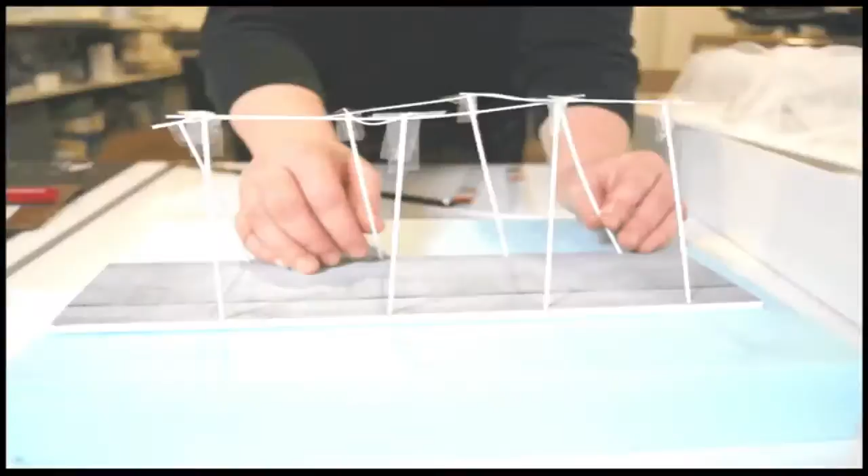So we started to think of this white Cartesian grid, the modernist grid, in a way standing for the idea of modernity. But then, rather than a stable grid, we wanted to make a weak grid - a grid that is not holding anything up, but is always on the verge of collapse, that is flexible and pliable, and doesn't offer support, but actually only offers imbalance.

And we thought of this idea to cover the entire courtyard with this weak system, this white gridded system made out of fiberglass poles held together with bungee cords, then populated with activators - things that would make people interact with this system. The idea being that we are responsible for these systems. We inhabit these systems, and if we start to interact with them, we might cause ripples, deformations, and collapse.

And so we went to MoMA and said, we're going to fill this courtyard with a system that's always on the verge of collapse. And we realized it's probably not a good idea to propose that when there's 4,000 drunk people there listening to bands and DJs.

So the day before the presentation, we quickly faked this image in Photoshop, and we grabbed a logo from Buro Happold, which is a big engineering firm in New York. And we said, we understand it's very risky, but don't worry, the whole thing has been calculated, and it will stand. And so MoMA said, that's great, you win.

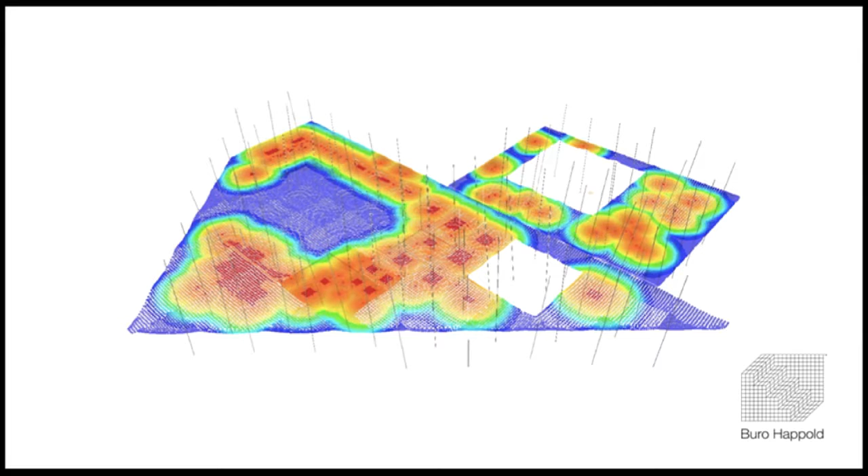And so we called Buro Happold, and we said, congratulations, we won. And they said, what did we win? And we said, well, we have this idea of a system that is continuously being fed with unpredictable inputs that can collapse at any moment. And he said, that's great, but the funny thing is this cannot be calculated. This is the opposite of what we do as engineers. What we do is we design risk outside of the system, and what you want to do is infuse the system with as much unpredictability as possible.

And so all you can do is build it. And so we went to the courtyard, and we started to test. This is Ilias, who now became partner. He was our first staff. And you see the elements that it is made up of.

And we were trying to find a way in which this system was dancing and sort of finding its balance, but also led to certain instability in a certain way. And you see the activators. We had hooks and balls. I will speak about those in a little bit. And so that looked really great.

And then we went home, and we got an email from the caretaker at PS1 saying, can you please come and clean out the mess? We have a donor event tomorrow.

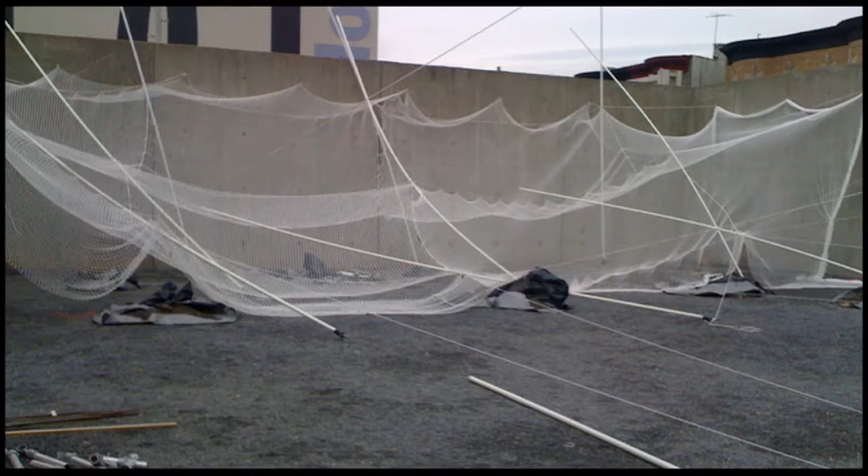And so we realized that through trial and error, we ultimately found, by calibrating the amount of cells and the tightness of the knots, we were able to find a balance within the system, and gradually this supplely responsive system started to emerge within the courtyard, which then was activated by these balls.

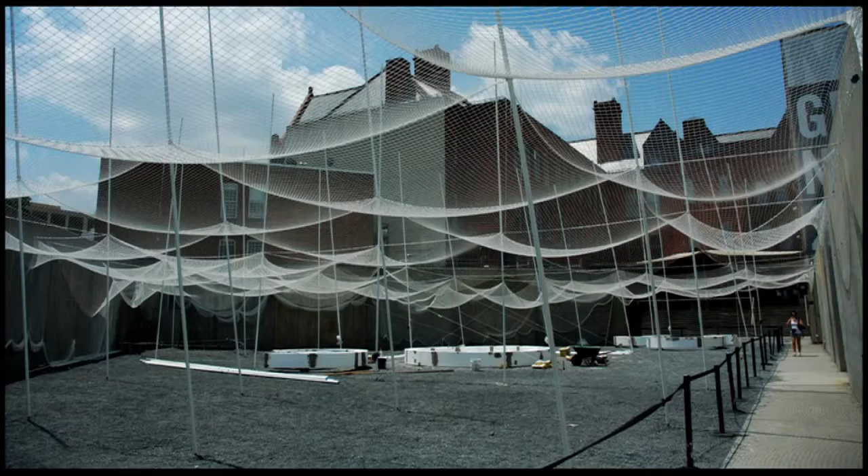This was in a way also alluding to the virtual realm, which to an extent seems more playful, and we wanted to create things that people could invent games and start playing with. And so these were images we found online on social media showing how people started to actually work within this system. So this was a system that had a certain definition to it, but at the same time was left open for interpretation and play.

And later we worked with other people that were interested in doing performances in this. We worked with a composer who connected the system to a sound system where you could move the poles and they would change the sounds. There was actually a dance being done by a group called Body and Pole, which were professional, the American champion pole dancers, who did a performance here. And so this idea of an open system, where you give a certain definition and you allow people to find ways to occupy it and work with it.

So that was one temporary installation, but that's nice within the confines of, say, the art museum and the institute. But how, if you really want to operate in the real world, how do you do that? We had to sort of develop an attitude for that too.

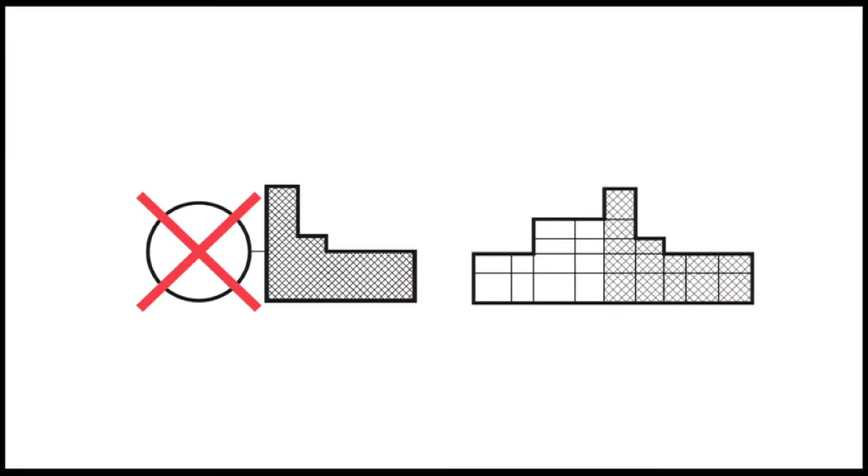We didn't want to make a generic extension. We wanted to integrate on the right the old and on the left the new in white. We started to think: can we come up with a very simple organizational system, because there's no collection—this museum doesn't have a collection.

So how can we organize a system for ideas and artists that don't yet exist, but create a new infrastructure for display within that? We looked at what makes the existing building specific—it's actually not their spaces, but their openings. We started to think: can we work with just the wall and the opening as a way to generate a scheme? We looked at the traditional museum, which is basically the enfilade organization.

It's a traditional way of storytelling in a museum. You go from room to room to room, and the curator can very precisely orchestrate your experience. And we thought that's too traditional for today.

Then we looked at a more modern idea of exhibition rooms, where the wall opens up at one end and space flows from one to the other, which I think is a very typical modernist idea. But we said, what is a way of navigating, what is a way of storytelling that fits with our age, in which we in a way tell our own stories.

The way we browse through the internet, the way we curate our own visual identity and collections through things like Pinterest and Instagram—how do we navigate space, contemporary space, in the physical realm?

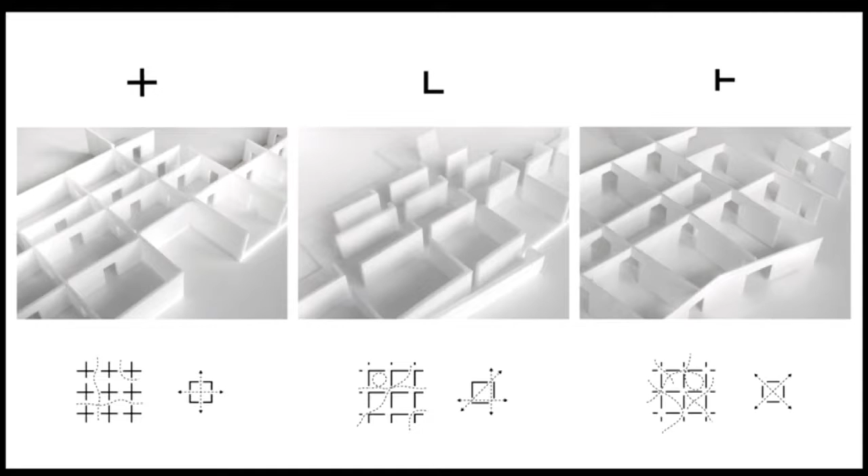So we made a very complicated looking script to impress our Belgian jury. But actually it's a very simple thing: this being the city, this being the beautiful garden, this being the old museum, that being the new.

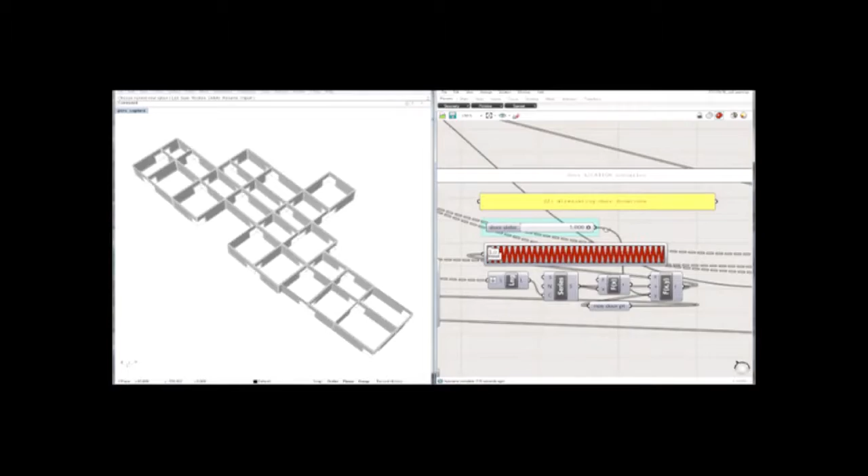It was a very precise calibration of openings and where they sit within the rooms, and they would increase from the city towards the yard. So the further you get into the system, the more porous it becomes, and the more it opens up into the garden. And so the scheme we settled on was basically closed corners for concentration.

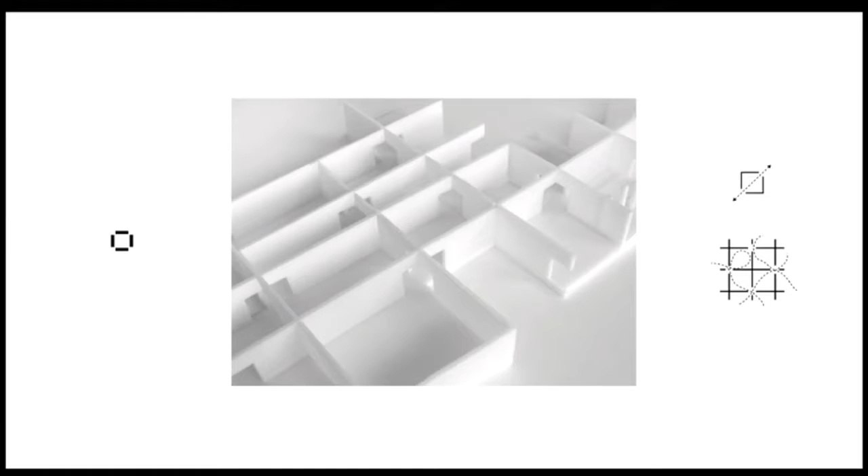Where the rooms come together, the doors overlap and create these portals. That means that every time you come out of a room, it's up to the visitor to make a choice—where do you go? How do you continue this story?

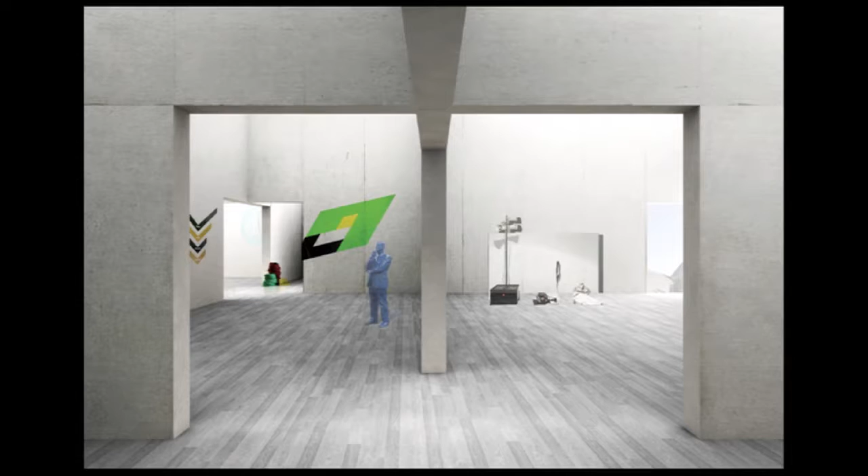It's a completely different way of thinking about how to organize a museum. It would allow for completely new ways for curators to organize space, because, for instance, they could have parallel stories, parallel narratives happening within the same system.

So we took the old, we extended the new, and we cut these openings, and we also changed the existing building toward these openings. This is a model we made, and it showed that old and new came together not by adding, but actually by subtraction. And here you see the plan.

There was this entrance toward the city—this is the commercial city, but you enter under the oblique, and you come back into the old entry hall. From there you can move through these spaces.

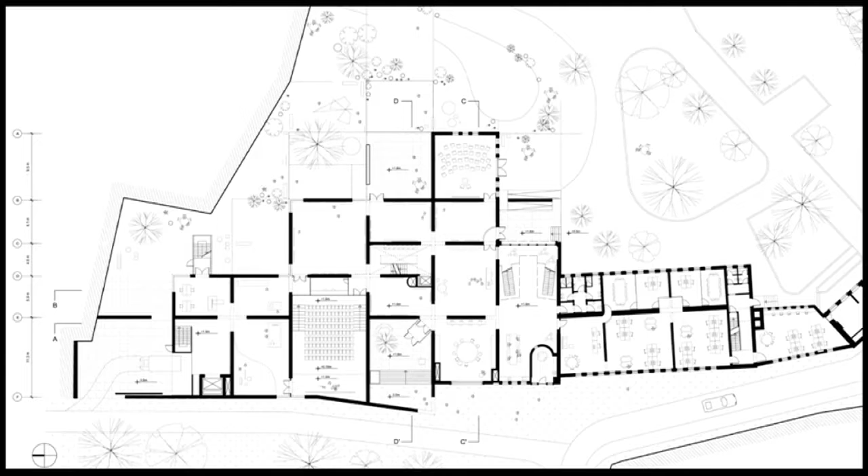Rather than fitting the program really precisely, because programs change continuously, we said you have a variety of rooms, a catalog of rooms in which different things can happen. It's a very simple but robust infrastructure, and with skylights and proportions we changed, so although the system is very rigid, there was a lot of variety of spaces.

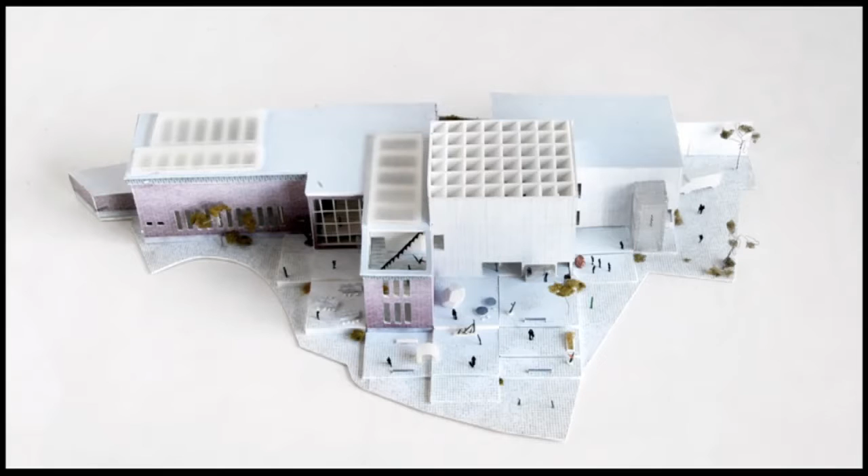These spaces can be used for display, but they can also be used as a library or reading room or what have you. Here you see the massing of the extension and the way it sits within this courtyard and becomes part of the urban fabric as a frame.

And so we became second, which we do a lot.

But then—is it a year ago now? No, maybe actually a year and a half ago—we were asked to make an exhibition in the Netherlands for a collection by a Dutch collector who had been collecting for 60 years, and this was the first time they were going to show their collection to the public.

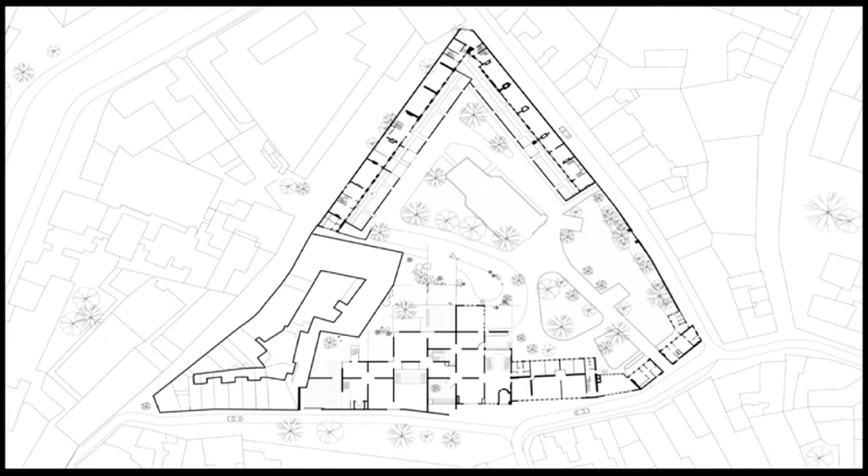At the Stedelijk Museum in Amsterdam, which is the municipal or public museum of contemporary art there, we worked with the same system, and there it played a slightly different role.

This idea of choice, of you as a visitor being forced to choose your path rather than being led by a curator, resembled the way the collector made his own choices. Every space had an artist, but every time you came out of a room, you had to choose the next way to move through the space. Very similar to the choice a collector is forced to make, and trying to see new relationships between the different artists that he and his wife had collected over 60 years. So in some way, the structure here was trying to resemble this act of collecting, decision making, and finding longer relationships in that collection. That speaks about structure and the idea to think about it.

Now let's talk about edge. This is a project we completed in 2012, a gallery for contemporary art in Seoul, Korea. This is Seoul, looking from one of the hills in the north towards the more historic area where the gallery is situated, and on the right, at the end, is the palace. This neighborhood with a lot of beautiful old homes was housing for people who worked in the palace, and is now preserved as one of the few historic areas in Seoul. It's becoming a very popular area for tourists, with coffee shops and nice ways to spend a Sunday. Programs are moving in, and a contemporary arts scene is moving into this place.

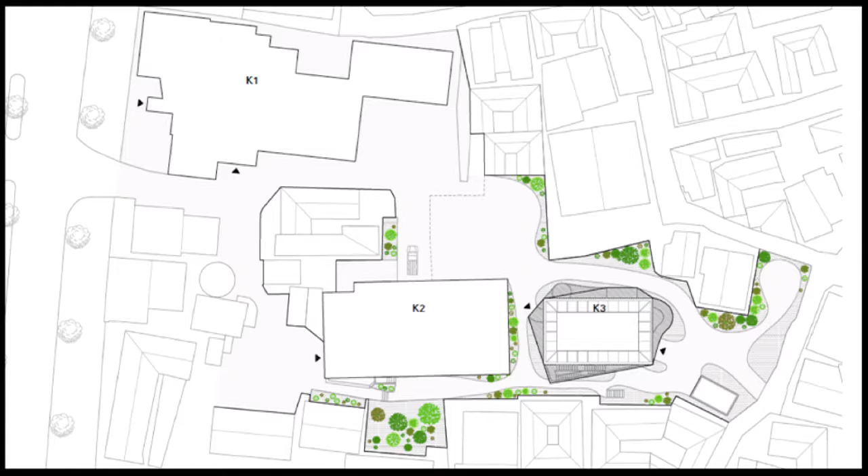So it's a contemporary arts gallery. They already had two buildings, Kukje Gallery K1 and K2, and we were asked to make the third. As contemporary art goes, we don't know what it's going to be, so make the biggest box possible is typically what's being asked when making spaces for contemporary art. You see how these old historical courtyard homes around there are being gradually infiltrated by these larger anonymous white cubes for contemporary art. So we looked at what was the biggest box possible there, zoning-wise, to fit within this area, column-free and tall, emphasizing the clarity of this box.

We pushed all circulation out. There's two floors of storage and a theater underneath, and the elevator and staircase take you out of this box and into the spaces below. This is the entry, the vestibule, and this is a staircase to the roof from which you can see the palace. We were about to fly to Korea to present this project, and we thought this is way too hard and aggressive for this very fine-grained, soft, fine-meshed context.

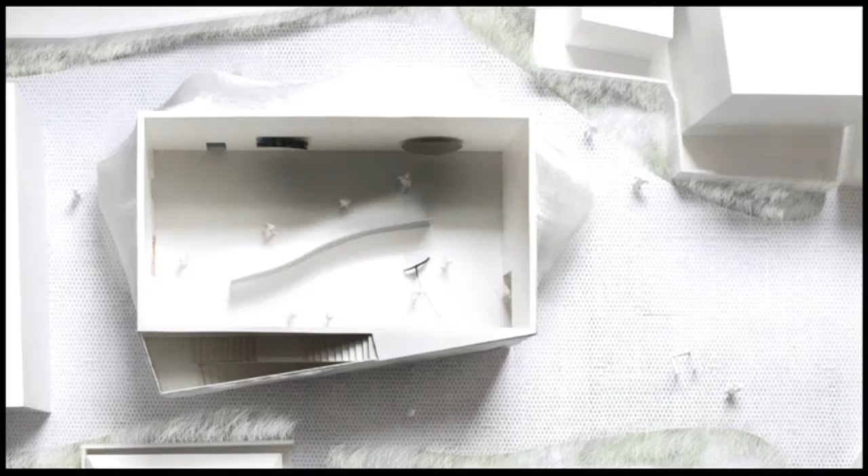So before we left, we thought, let's wrap this thing in some sort of soft, permanent fog, some boundary that erases this diagram, creates a space in between, something that evokes that image we showed. We made this model, went to Korea, and our client, a very busy lady, came, took her sunglasses off, and said, 'I like it, make it,' and left. Seriously, that was what it took, one minute.

She didn't ask, "What is it?" Because we had no idea what it was either. We just knew that we had to make it. So we had to think, well, what is this thing? What is it? How do we make this? And we realized it has very complex geometry.

We realized it wasn't about the geometry. This project isn't about its form, so we didn't want a very hard, articulated form. We didn't want to shingle it, build a structure and support it the way Frank Gehry might. It needed to have a softness, but at the same time it's outside, there's snow, it needs to be strong and withstand the conditions there.

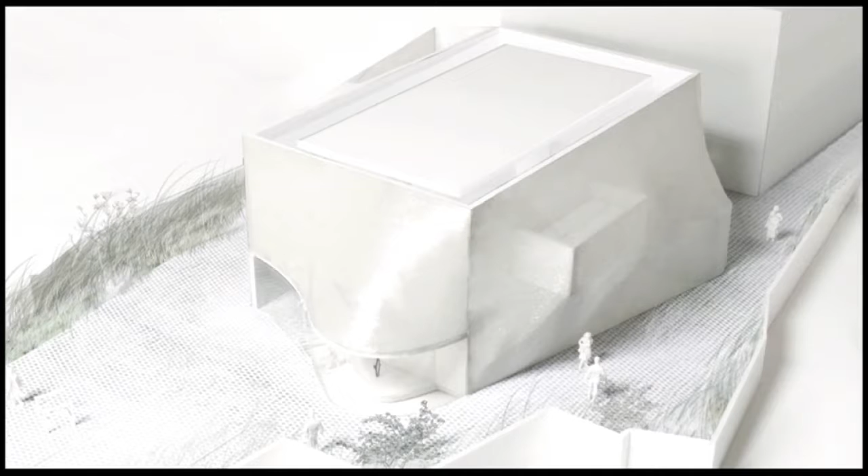So we were looking for something very pliable and at the same time very strong. We looked a lot, and then we came across chainmail mesh, which plies beautifully to double curvature and at the same time is very strong. But it's designed for the body, for armor. It's now used in butcher gloves, fencing gear, and belly dancing attire, but it's not something made for architecture. It's not a material that exists within our architectural vocabulary.

So we started to test. This is the biggest you could buy online or in stores. These were tests in our office, because what is the scale of the building rather than the scale of the body? How do you want this thing to appear? How do you want it to look? And also, what is its scale, basically?

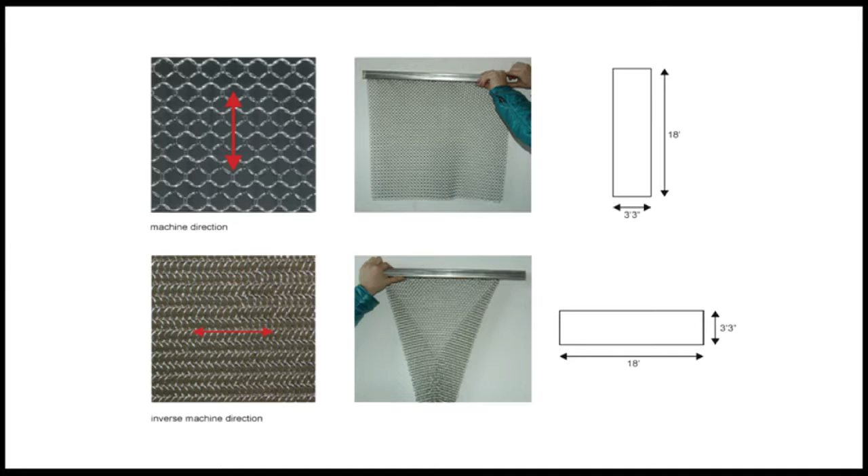As we were doing tests, we were also trying to understand how does it actually work. How does this thing take on this complex geometry? Because it's not elastic, but it works elastic, it works because of the way these rings tie together. So we started to understand how this thing works, what is acceptable, how taut can this thing be. We mapped the whole building.

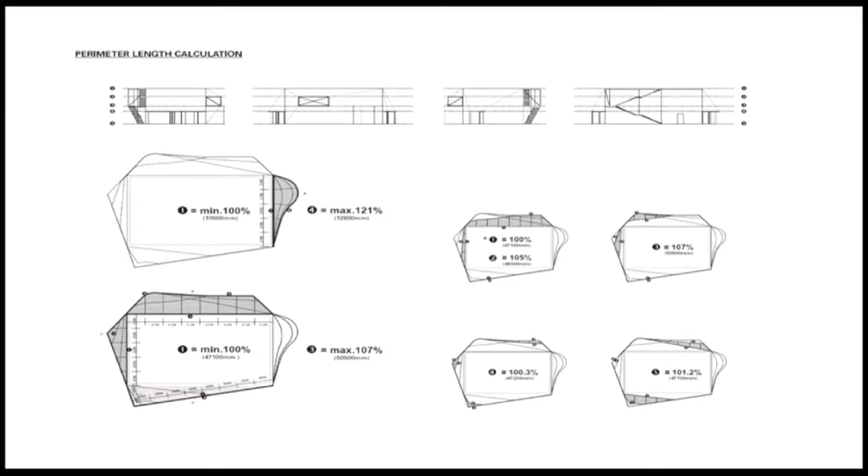Then we started to talk to our friends, engineers we had worked with in the past, Mike Ra, a friend of ours. He said, well, if you now know roughly how big you want this thing to be visually, let's start testing it. Let's see how strong it needs to be, let's see how thick it needs to be.

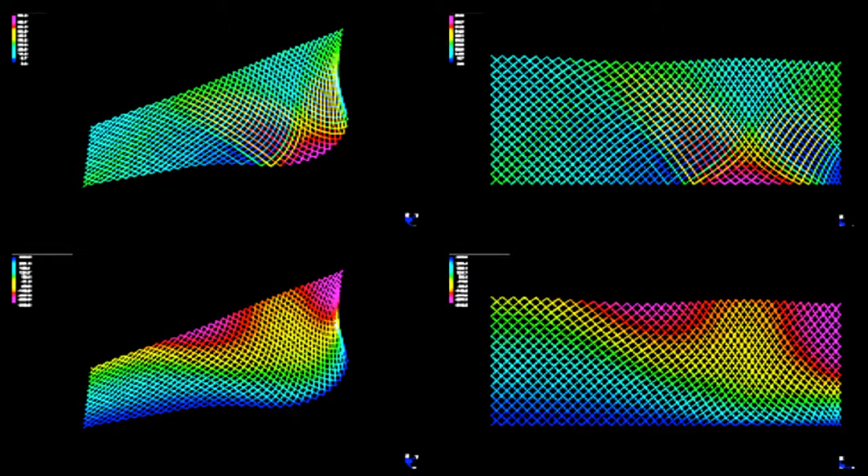We started to do some tests in labs, and very quickly they were able to model this thing, the whole skin, in the computer. We had a perfectly beautiful CATIA model with every ring in there and its exact behavior. But because this thing was never done before, and at that moment we had already promised our client that we would realize it, we thought, let's have a parallel process.

Let's build the same building physically—this is in our office—at a 1 to 10 scale. We always try to balance what you can do in the computer with what you can do physically, and I think that's the way we typically operate, checking the physical and the digital against each other. At this moment, we really knew what this was and how it would work.

So then we thought, are we now going to translate this into Korean and write a Korean spec for somebody else to build? And then we thought, well, that's going to take a lot of time. Why don't we just make it ourselves?

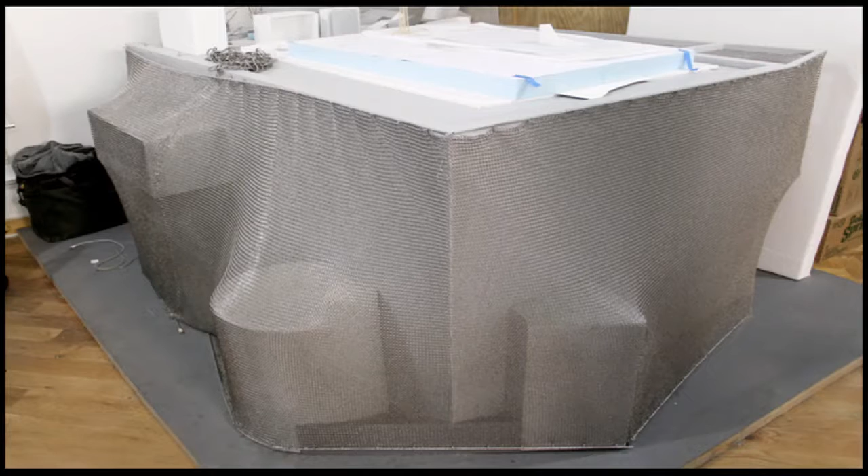So we went to Alibaba.com and typed in ring mesh, and very quickly we got a lot of people asking us to Skype with them. Most of the people were actually coming from Anping, an area in China. At some point we were Skyping for a long time with a girl whose Skype name, strangely enough, was Ring. After Skyping with her for a couple of months, they sent us this and said, hey, that looks promising, right? Maybe these people can actually make this.

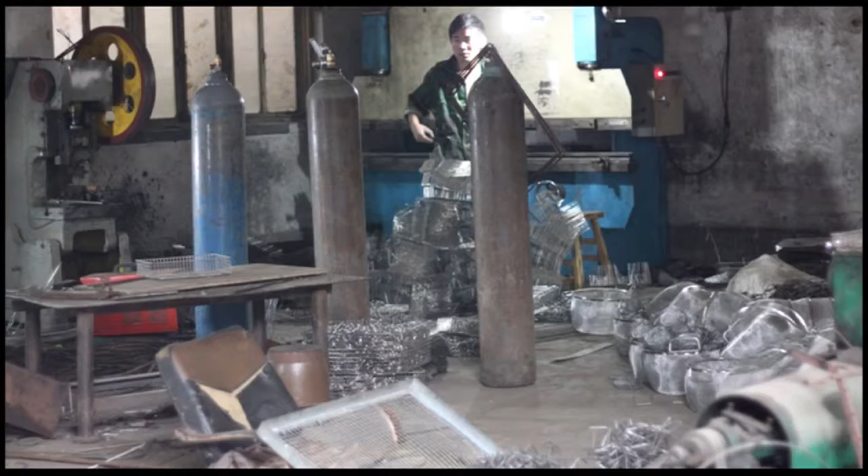So we flew to Beijing, and then we drove for 5 hours to the southwest. I don't know how many people have met their partner online first and then met in reality later. But we came into Anping, which was a strange town where you could buy dog on the street. We came into this very small courtyard, not much bigger than the area here in front of the seats, and there was one guy hand welding this stuff together.

Here's Jing, my partner, and there's Mike, the engineer, and behind him the ring. Jing here is explaining that we need 500,000 rings, and that it's probably impossible for them to actually make this, which was very disappointing, but also showed how incredibly weird our world has become.

Ring then said, well, everybody in this town can actually weld, so why don't we just all do this together? So we worked with them and with the whole community, and we found a new method of production where multiple people could work on the same thing, because all these rings are actually hand welded together—500,000 of them.

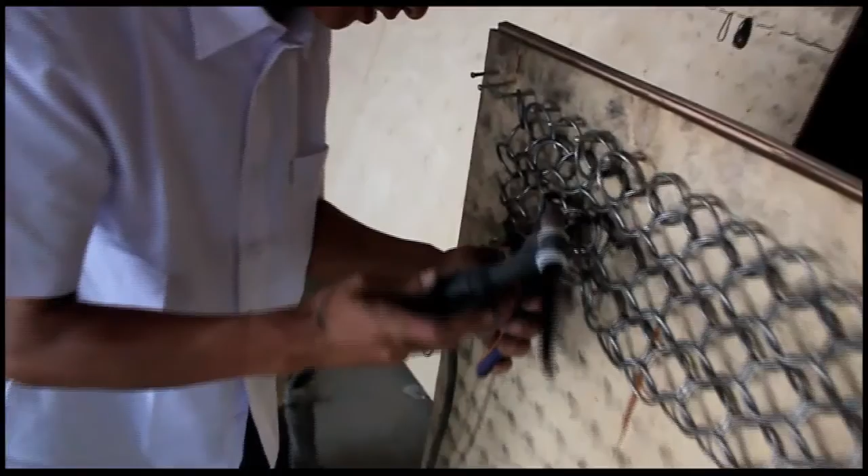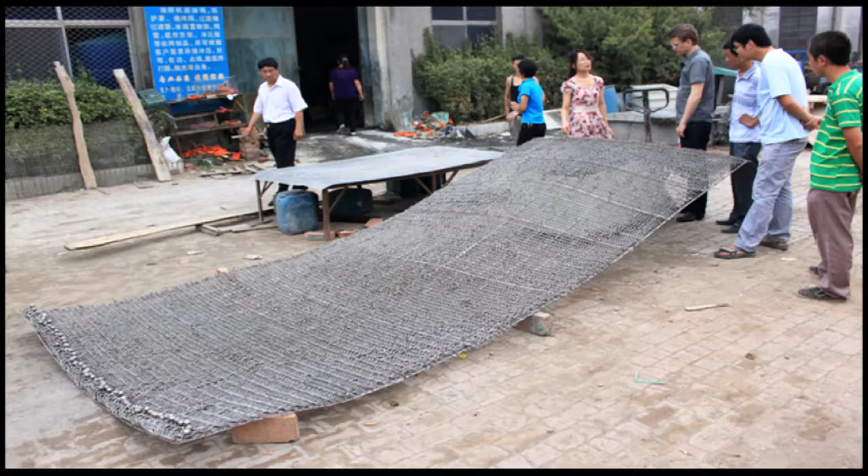The whole community participated, and at some point there were 60 people working with us in this place. We made 14 of these large swaths of rings. This is the local car wash, which was used for cleaning, and we used another place for quality control where every weld was being checked.

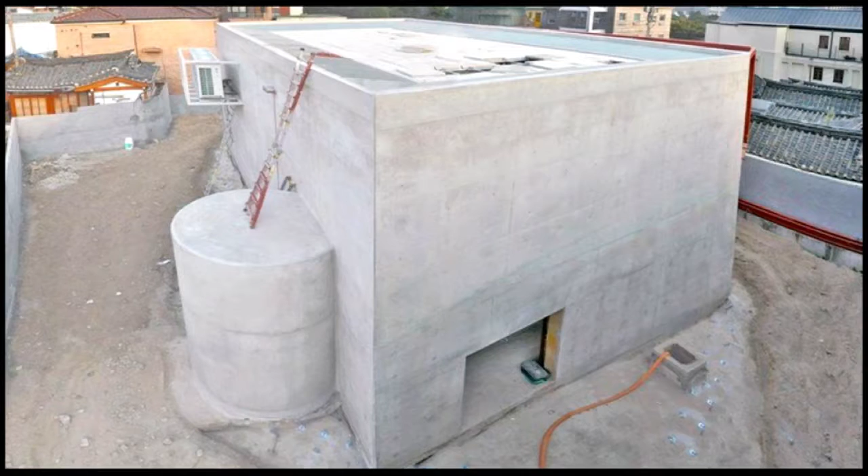We used the schoolyard for a mock-up. This mock-up was approved by the locals, and in Korea the building itself was under construction. The things were shipped, and gradually these 14 swaths were hung around this building.

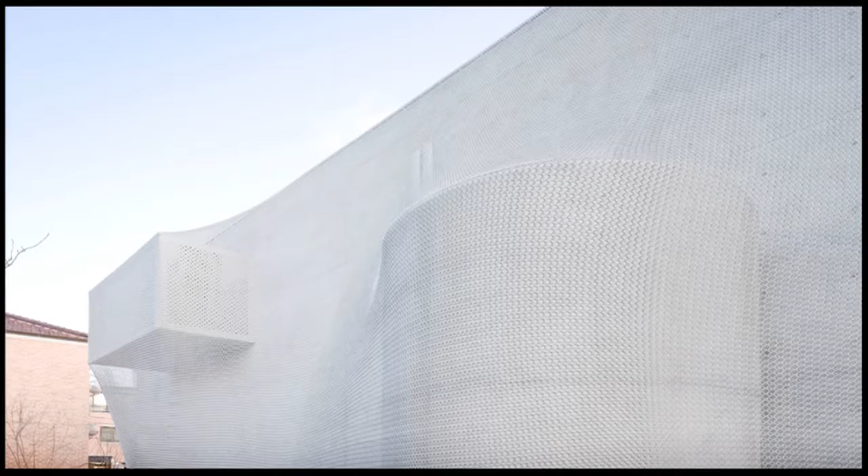We were able to weld these rings, these 14 mats, together on site in the same way as they interlocked in the factory, and so this became a completely seamless, stretchy veil around the building.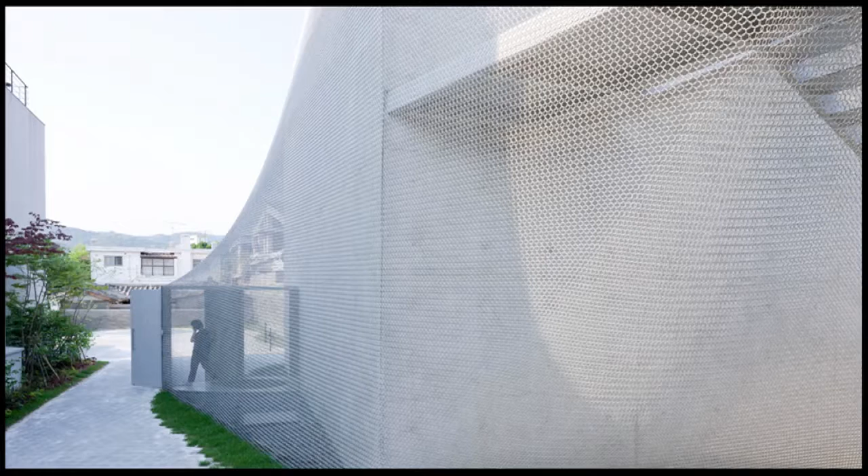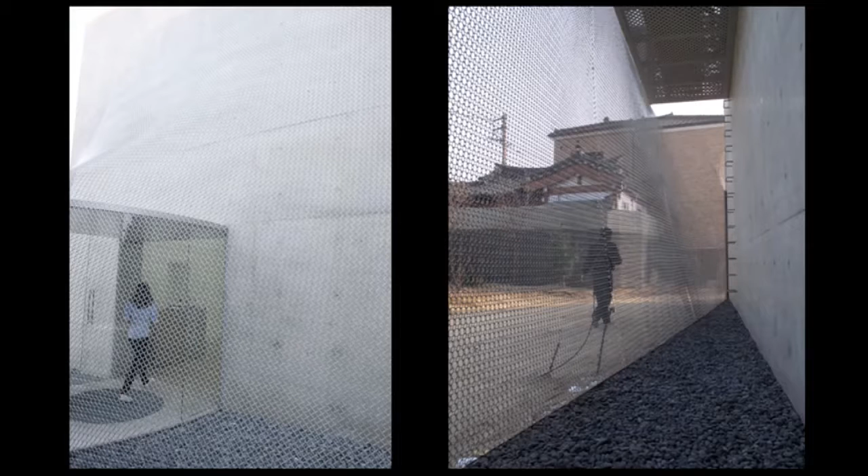Where these stairs and other objects push it out, there are moments where you can get in between the skin on your way up or into the building—these moments between, so that it is very clear space for contemporary art and the more contextual historic context.

Going to the basement, the stair peels out and you're back into the site, and you come into this black box theater below, where they show movies and have performances.

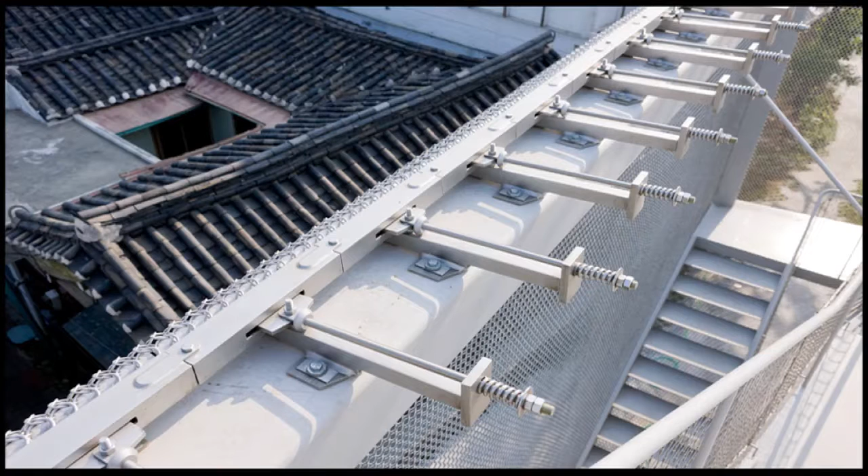So the old and the new come together in a very different way—not by repeating its context, but by responding to its context, also responding to a certain investment in detail and articulation. I like this picture because it shows the very crafted old roof of these old historic homes and the very crafted but new idea of our building.

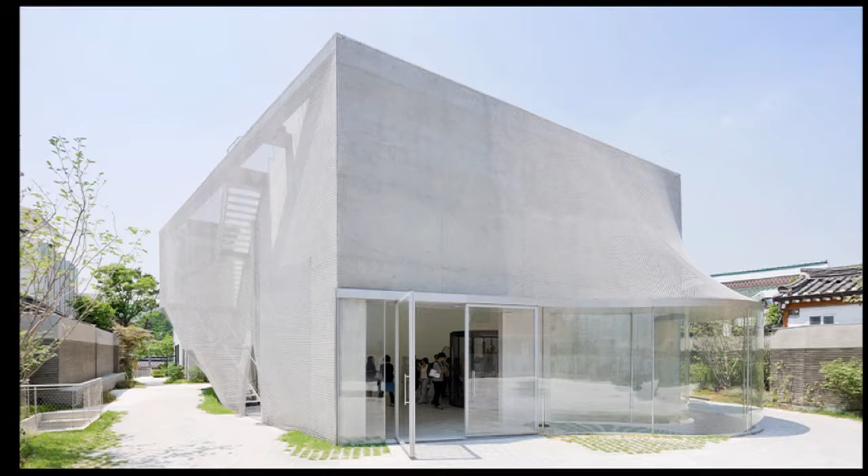And the light over time changes the way in which this thing appears. So this speaks to a deepened layer or defining skin.

There's a second project that maybe speaks to that, which we did at the same time—a space for a completely digitally operating company called Logan, a production company. They all work basically in the digital realm doing renders and representations, and they needed a workspace in Soho, New York—a typical project, old loft building in Soho, with cast iron columns that set the grid.

They work very, very flexibly. There's only 4 people who work there, but they sometimes have 40 people working there depending on production—it's all freelancers, people who come in for different teams. So what they needed was an incredible amount of flexibility in the space.

What you typically do is create a big open space. But sometimes there would be only 4 or maybe 8 people working there, and we didn't want to create just this vast space that at times would feel too open, but also didn't want a space that when fully occupied would feel really dense.

So what we did is very simple: we made two very long tables, put all the legs of the tables inside, and put the chairs on casters. Basically groups can huddle around different spaces—they can roll and organize themselves, with a big infrastructure in the middle of the tables where people could plug in their computers.

There's a massive server room and a mechanical room to cool the servers, then editing booths for the final mixing and sound, 1, 2, 3. Here's where you enter, and a little kitchen. The boss was sitting at the same table here—we cut the table with a glass wall. Here's the meeting room for when they had meetings with clients, and here's where the boss sits with two assistants.

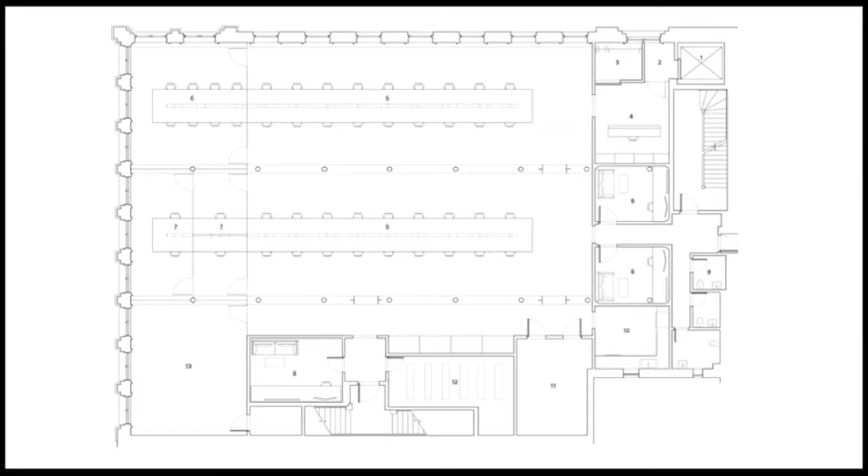And then we created this division in between these rooms with stretched theater fabric that spans the entire length of the space. You see those walls going here, and they take in the old steel structure, and they also happen in front of the old facade itself.

So what happens is you have these different groups working with each other in the same space, but they are teams that don't have to work necessarily with others. They are aware of the other to an extent, but at the same time their presence is filtered out and pushed to the background.

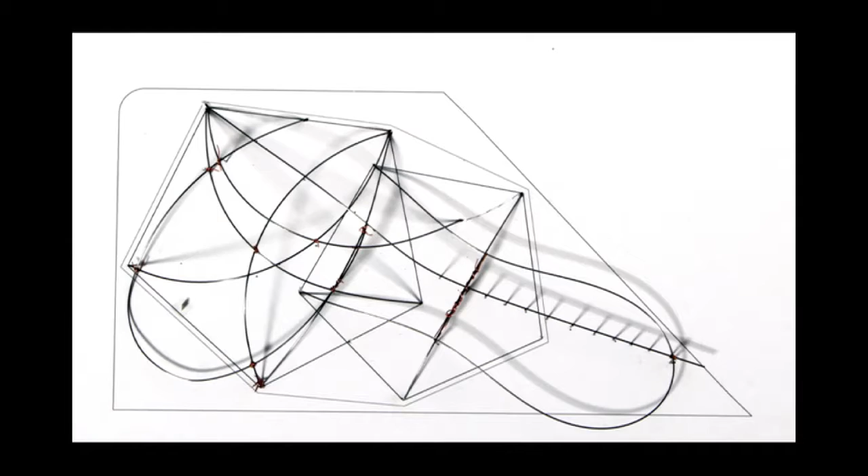And so we started to work through these study models, creating basically a very open structure in a way that rises out of the plane without really thinking about program or organization.

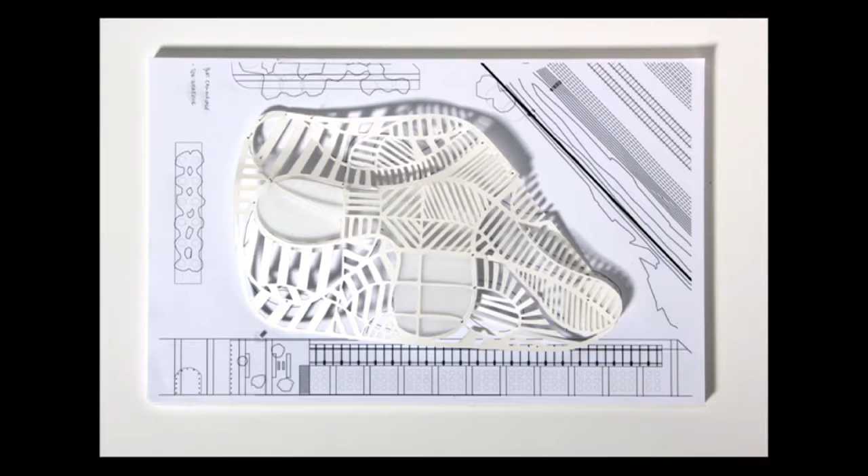We also realized the building is actually quite small for the site, and the budget was fixed, and there was this desire for this thing to have a strong presence. So how to make something appear larger than it is, and also how to respond to the very harsh landscape or harsh climate that can happen there during the summers.

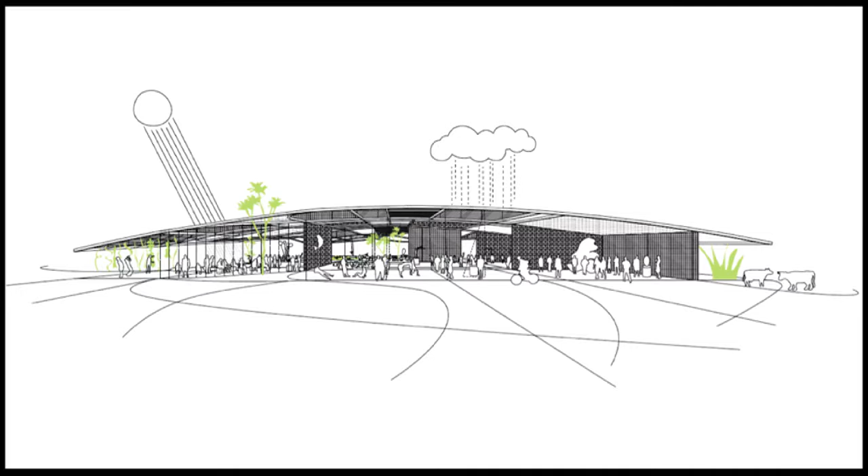And so we thought, let's make something that basically takes over the entire site as a large open canopy that covers the whole site and creates a variety of spaces both inside and outside, independent of its program.

And so again, from on top, you get this variety of different spaces, dark and light, open and closed, large and small, that come together as a patchwork of these spaces.

And only after that did we start to project functions or zones in which some of these functions could start taking place. And ultimately the scheme is this continuous field.

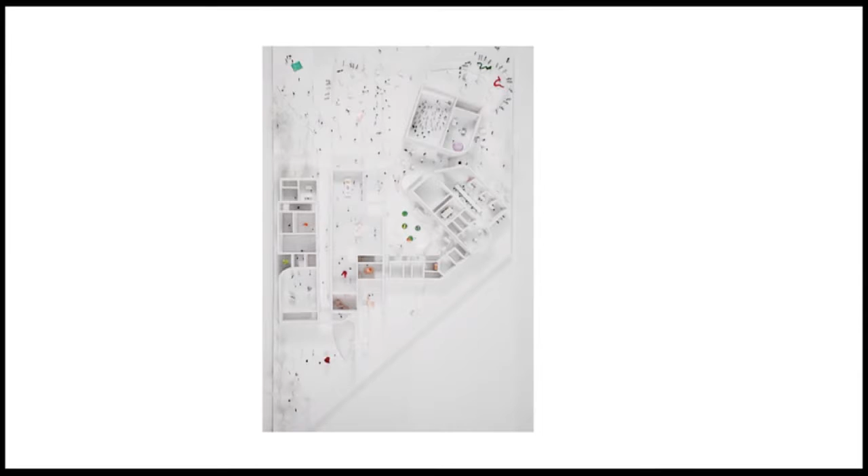The campus continues into the site, and within that you find this field of different types of spaces that come together under this large canopy roof. And so in a way the form defines this specific place on campus.

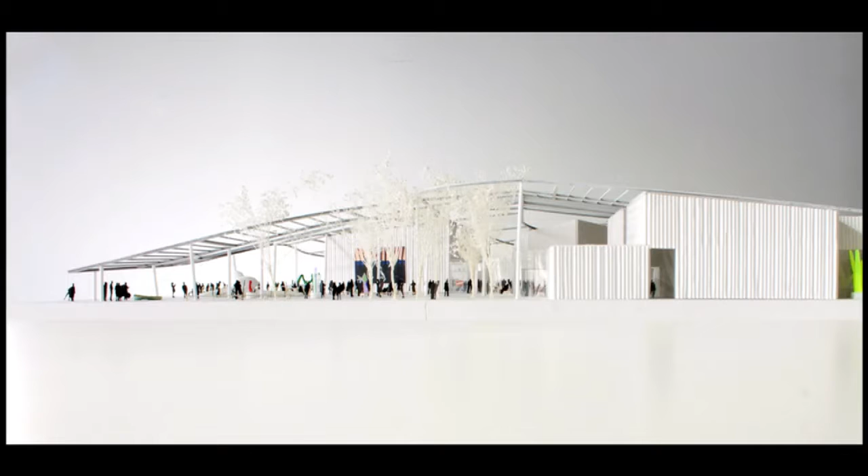And this one we won, which was nice. And so we could start building them.

But because it was design build, it also meant you had to make many decisions very quickly, and those things needed to be immediately known products, because the building company wanted to know exactly how much everything cost.

And so we had initially thought of this canopy as perforated metal that covers the whole building, because that was the only product we could find that had a set price. But we also realized that that's not completely right.

And that was also right when the drought became a real urgent issue in California. And we felt we needed to continue to develop the scheme, and in a way this idea of a variety of spaces and the climate and environment as something that is really tangible, that can be experienced while you are there, was something we wanted to get into the building itself.

And so we started to look at a beautiful arboretum nearby, and we saw the way the trees create shadows, and tree shadows are very interesting because they have depth. A flat perforated plate would only create one type of shadow because it comes through one plane. But if you look at tree shadow, it's deeper shadows, and they vary from very crisp to very fuzzy.

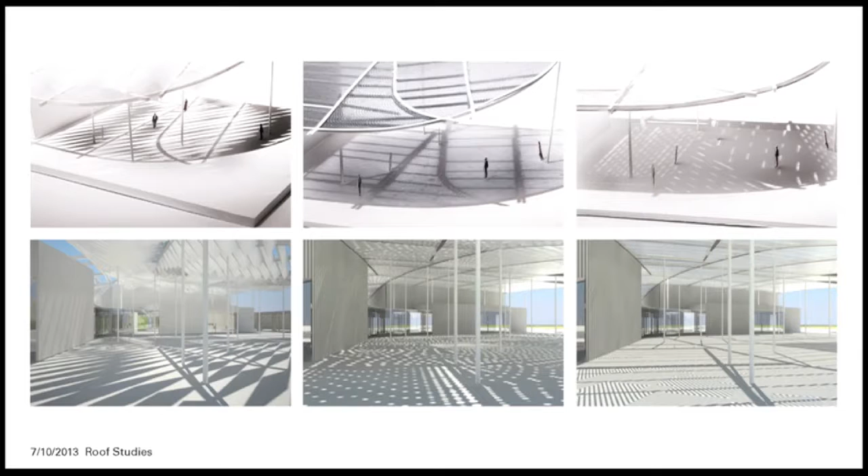And we were thinking, how can we introduce that into the building itself? Can we work with an articulation of the shadow that creates this variety of edges and borders? And so again, we tested this, all physical models, all digital models in parallel.

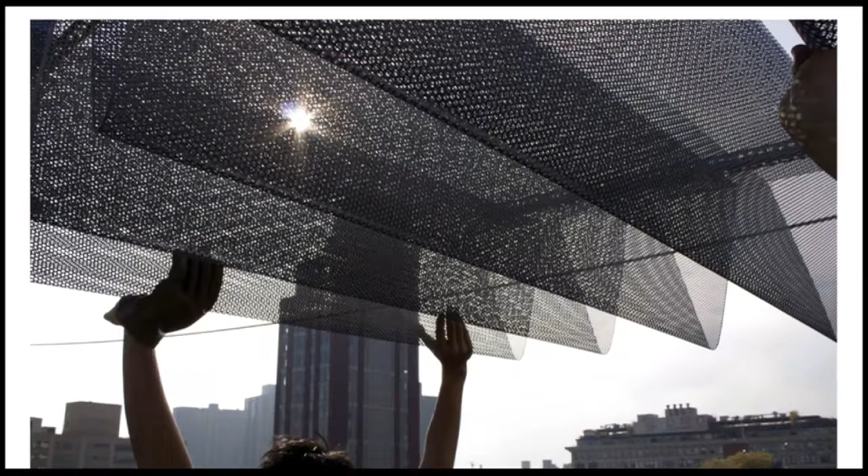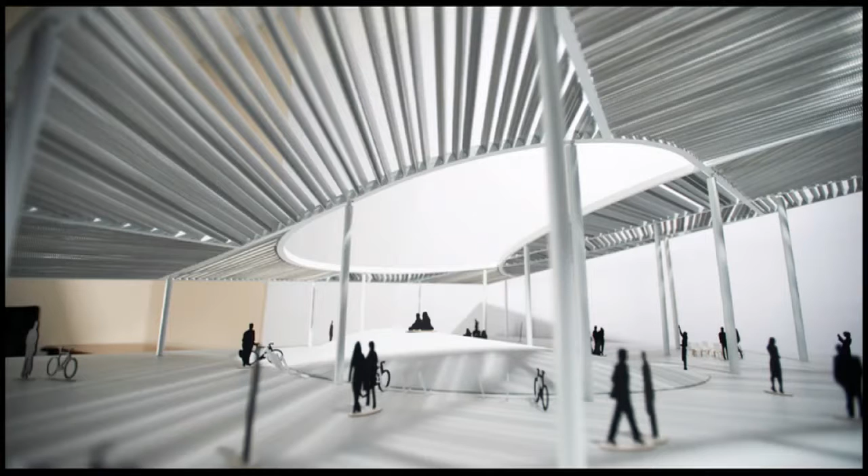And we came to the idea of how can we create multiple layers of shadows that fill in this entire roof. There was a very tight budget, so what we decided to do is collapse the secondary structure and the infill panels, because we had primary steel, then secondary steel, and then these panels. And we said, what if we make the secondary steel the infill, and actually fill the entire roof with these deepened, triangulated, perforated beams, because this gives us an ability to play with the shadows and the way the shadows come through the building.

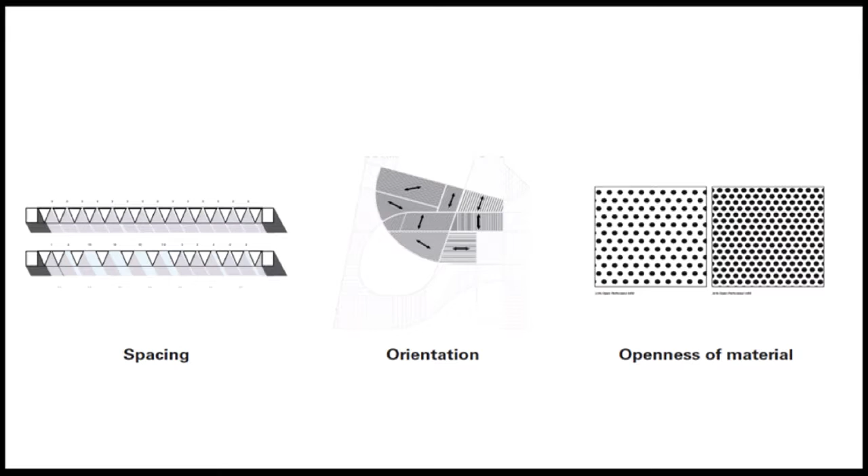These are the three parameters that we could play with: the spacing of these beams, the orientation of them as the sun changes so different shadows come through, and the openness of the material. It also allowed us to very exactly control the quantity.

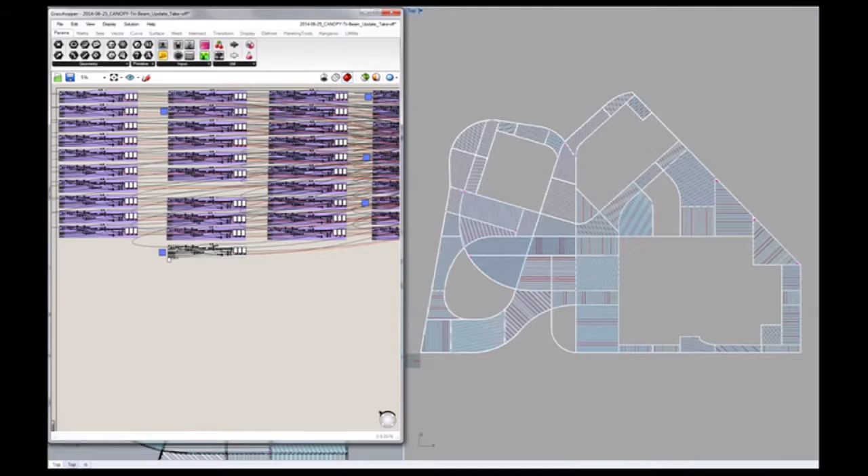And because our budget was set, it allowed us to have a lot of control throughout the whole process, to understand exactly how much material went where and how to create this variety throughout the system. And so we set up, this is the outcome of the density and the orientation of the infill.

Certain areas where art will be are always in shade. Certain areas that you can never see from straight below but are further away are spaced wider. This allowed us to really work and calibrate with that system of infill.

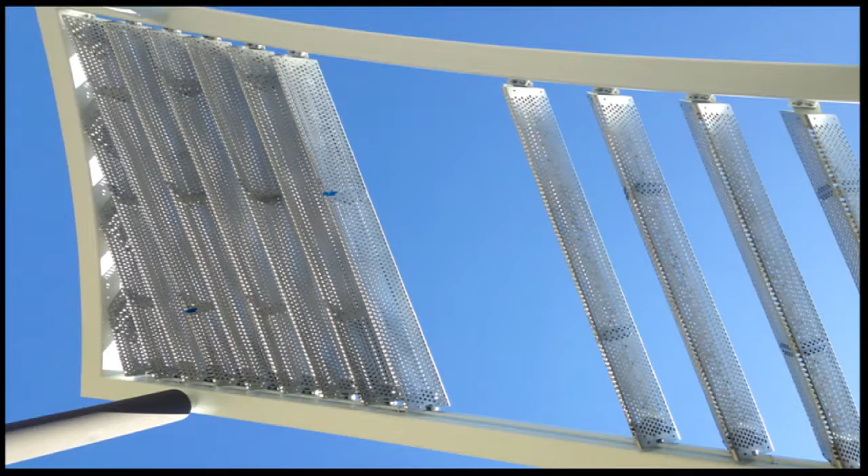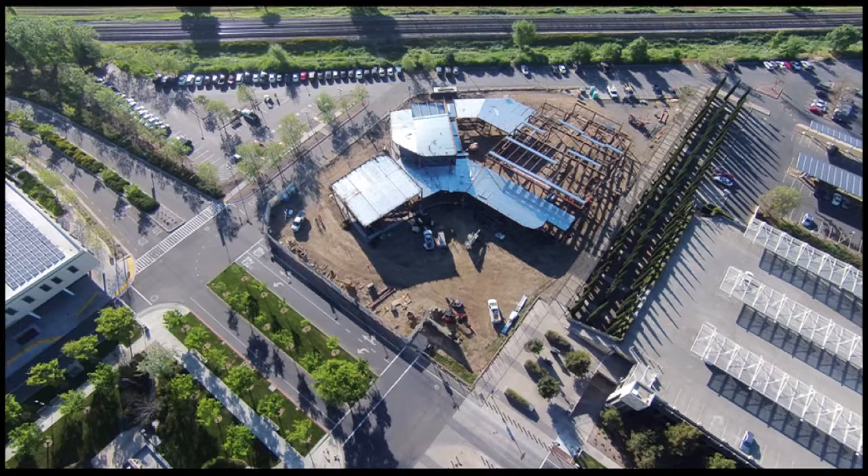This is a mock-up we did to test and see different finishes and start looking at these patterns. And these are some early pictures of construction.

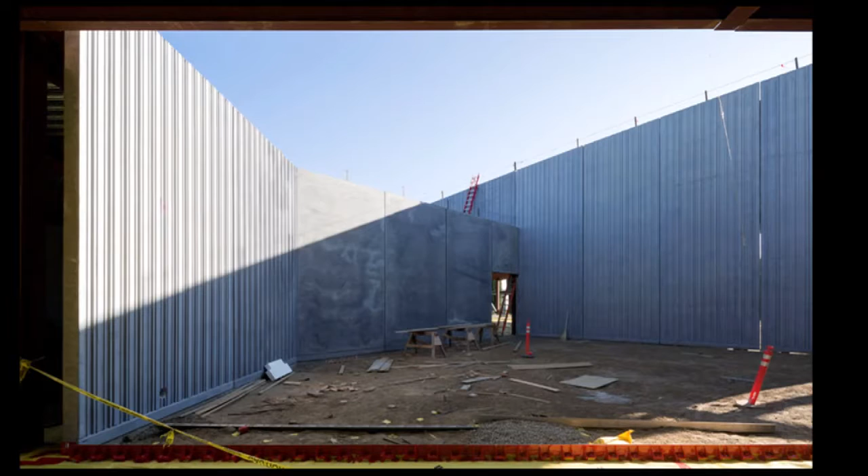This building will be done during the summer of next year. Here you see the large galleries and also the height of the canopy, which will actually go beyond that which is now being constructed.

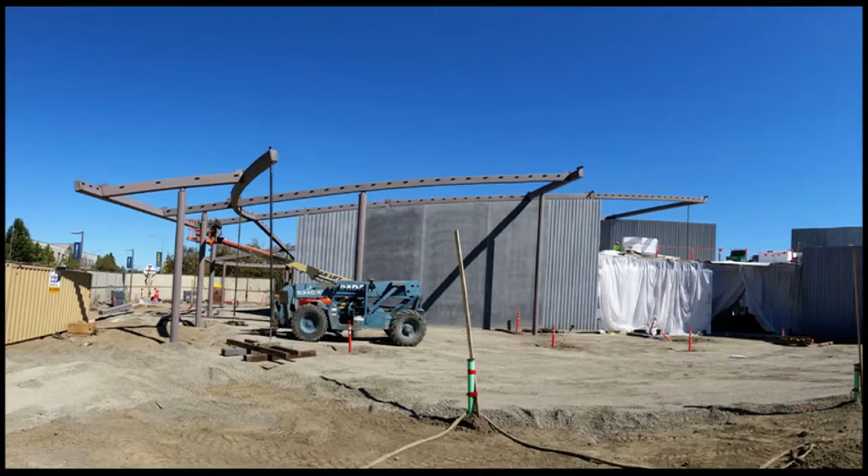And back in China, a different group than the people that made the rings, but we're working again with front to fabricate these different triangular beams.

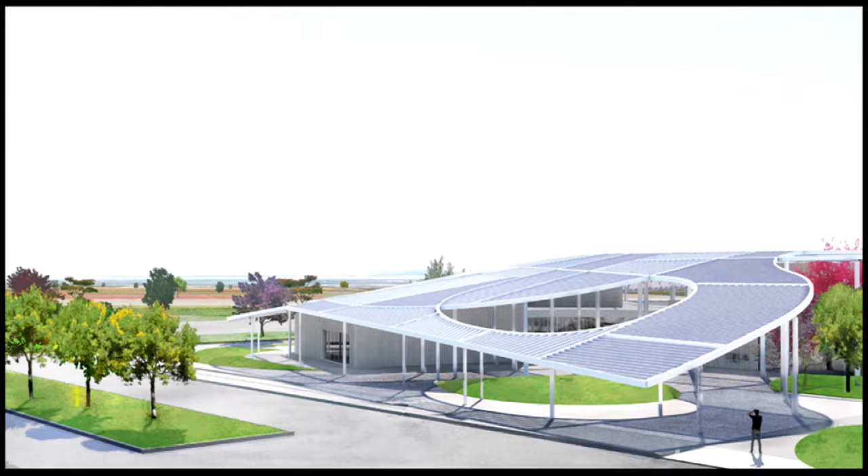So a temporary installation, very quickly. This is expanded metal mesh, the same mesh we used on the new museum, which is a very simple flat plate that you cut. By cutting it, it creates this stretchable fabric, which we used here.

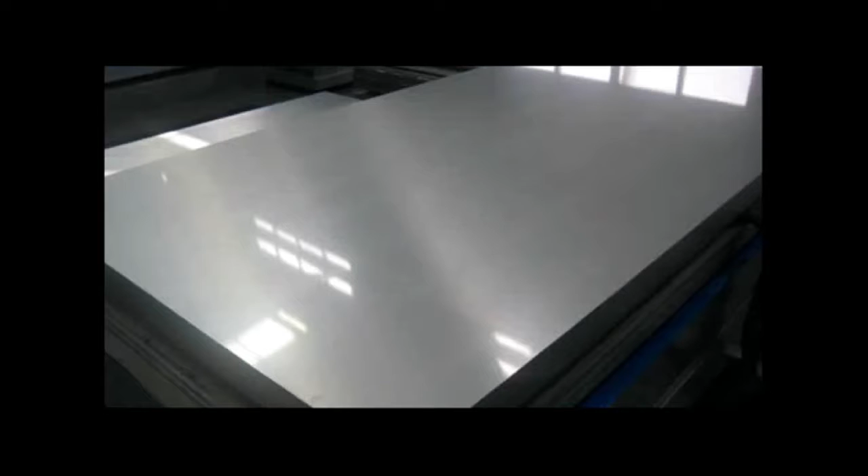And we started to think, what if you cut differently? What can you do if you cut differently? What if we cut in a circle? How can it expand in that way? So we did the same thing. We got a sheet and cut it in a circle.

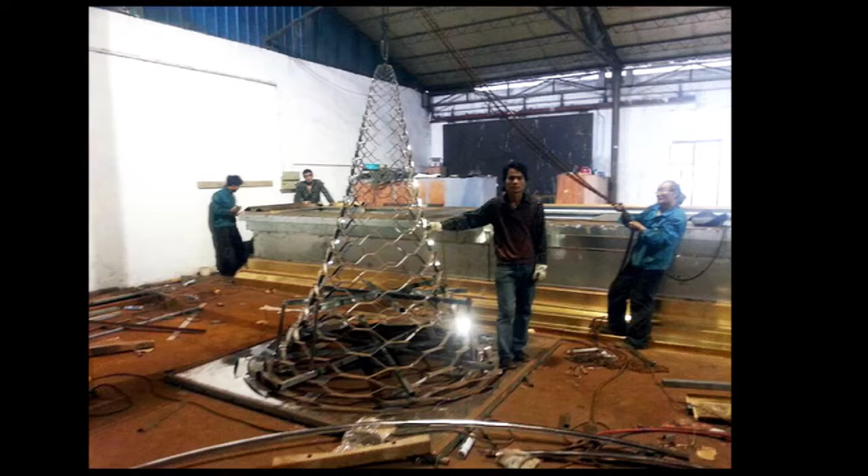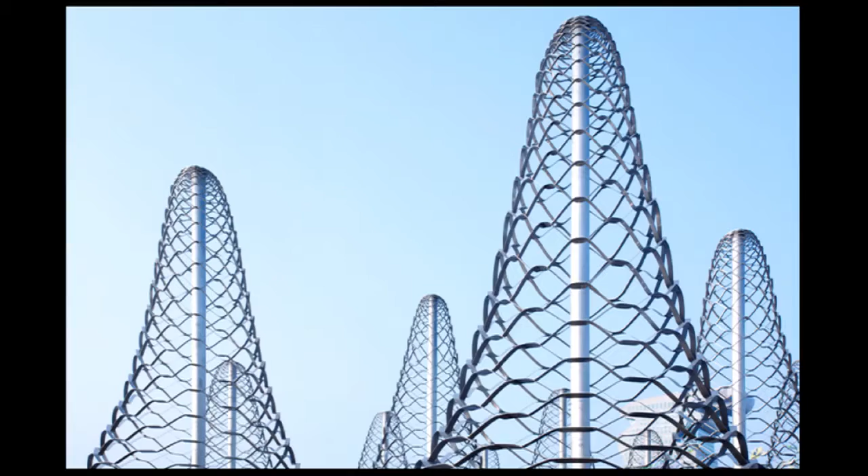And we made 16 of them for the Architecture Biennale in Beijing as a little pavilion opposite the Olympic Stadium. In some way here, we started to also think and experiment with testing these deepened layers and light bouncing through a deep mesh.

So the third thing is presence in a sense of volume. If these others were about structure and about edge, now the last chapter is about how to design a volume, how to think about a volume.

This is a project for an art building we're doing currently in Brooklyn, New York, which both houses art and at the same time is a place for performances and artist studios. So there's both a collection, there is gallery space, but there's also artist studios and performance spaces.

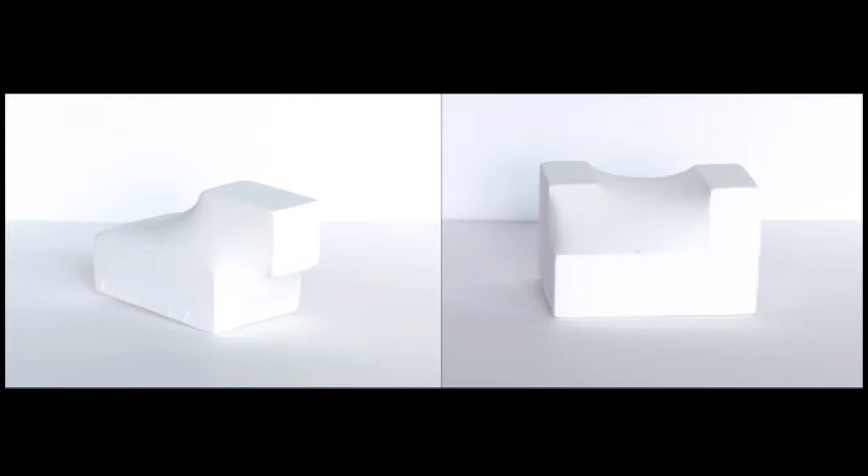So we started to think for this building how to give shape to something that is not completely accessible, that is not about transparency, but is also about announcing that something actually happens on the other side. These are very simple form studies we started to do with articulated volumes that in a way represent program, and at the same time find a way to veil this or hide it.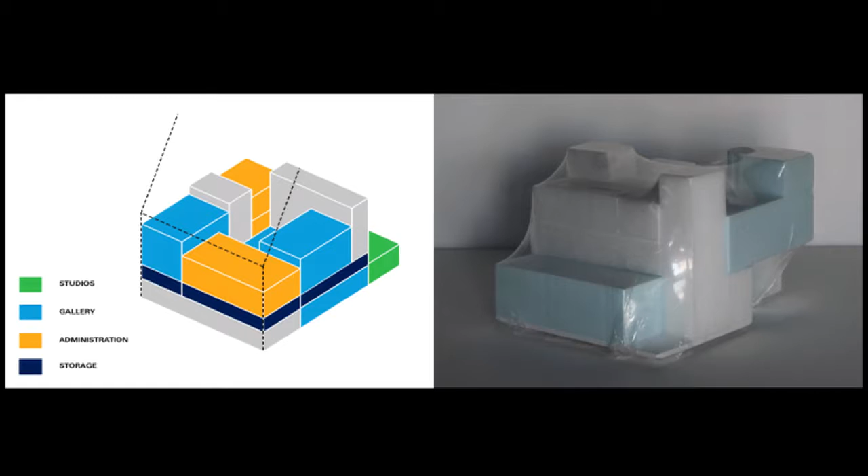The program is straightforward. As I said, it's in a street with two buildings on either side. It has studios, galleries, administration, and storage. So we started to experiment and see how do you make things, how do you find a form that sits somewhere between the legible and the illegible.

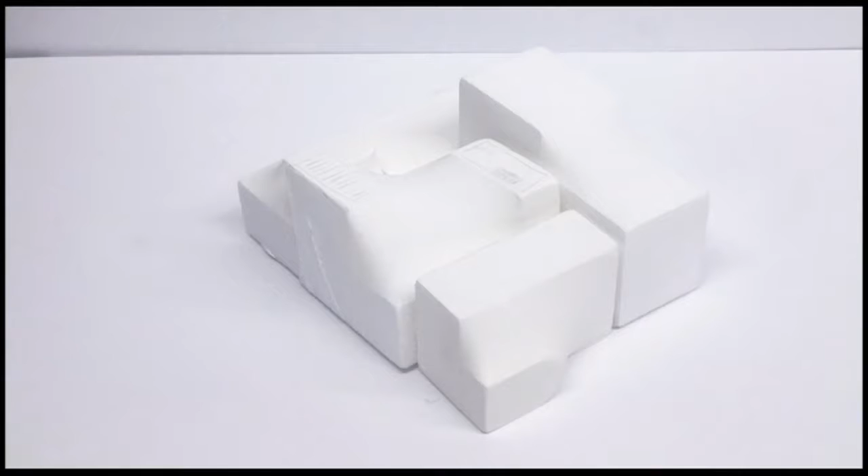We ended up realizing that we don't want to wrap this whole building in one single thing, but that there are maybe these multiple components that come together and in some way present themselves as this puzzle of pieces. This is the building at a certain stage before the end of schematic design, but it is pretty much the way the design to an extent remained.

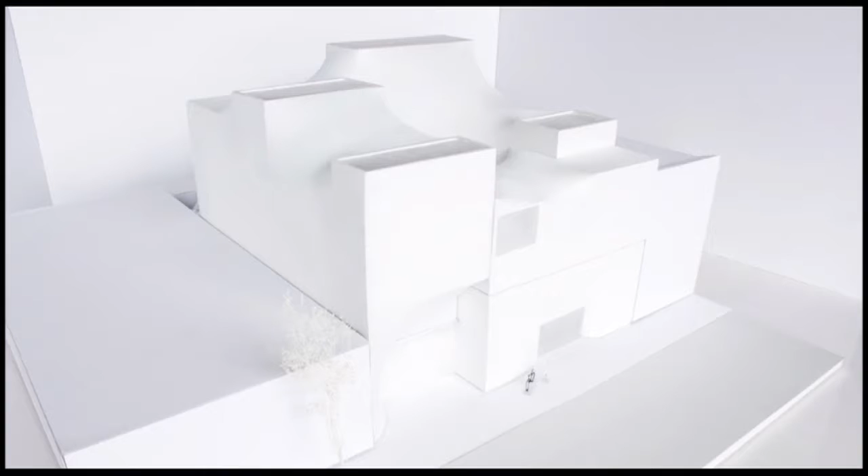So what happens is that wherever these volumes push towards the edge, it's where the building opens up to let people in or let light in, with windows or skylights or ways to negotiate with the exterior. This creates quite a complex geometry.

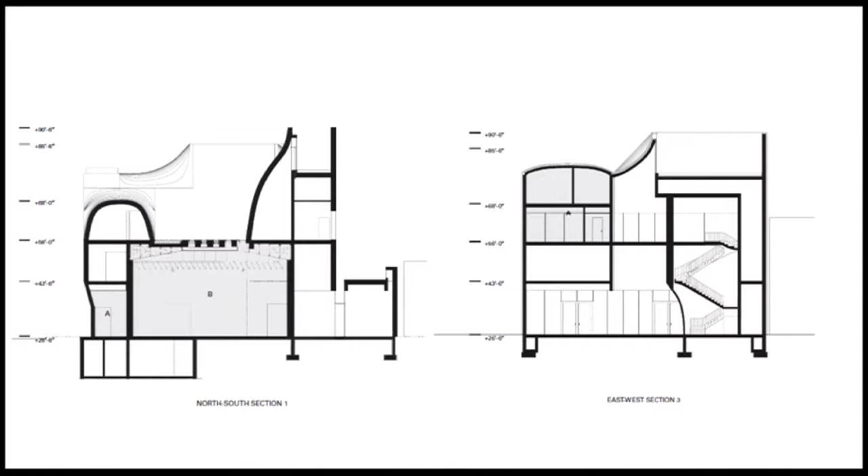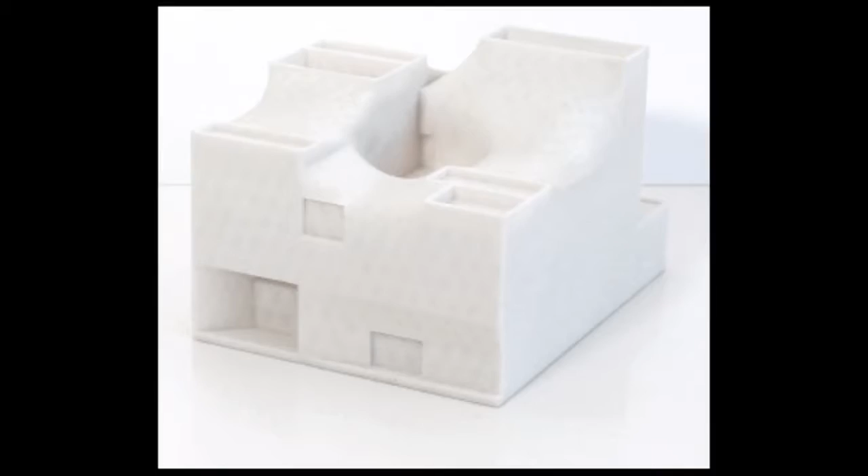Wherever these elements push out, you see it opening up and letting light come in, creating different opportunities for skylights or clerestories, and even a room that has both a clerestory and a skylight. So this is the building as is, which we want to make out of cast-in-place concrete.

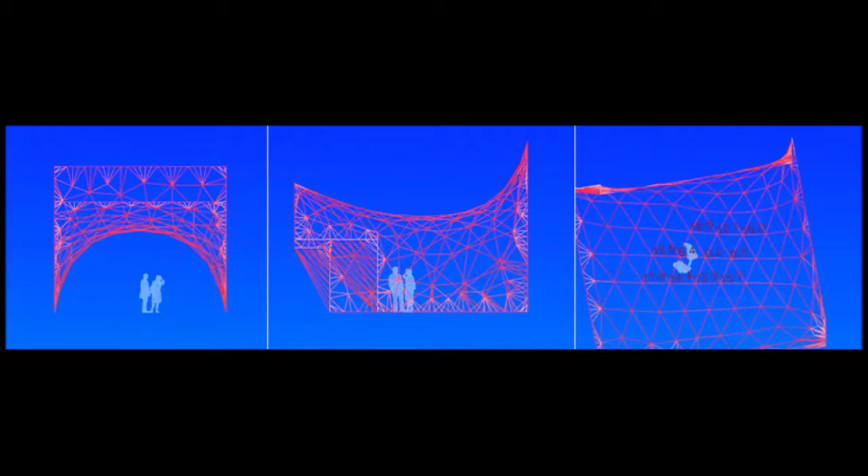We worked here together with a friend who is a very good mathematician to help us understand the geometry of this stretch. And with that, we could actually define how taut we want to stretch this material as it forms between these frames.

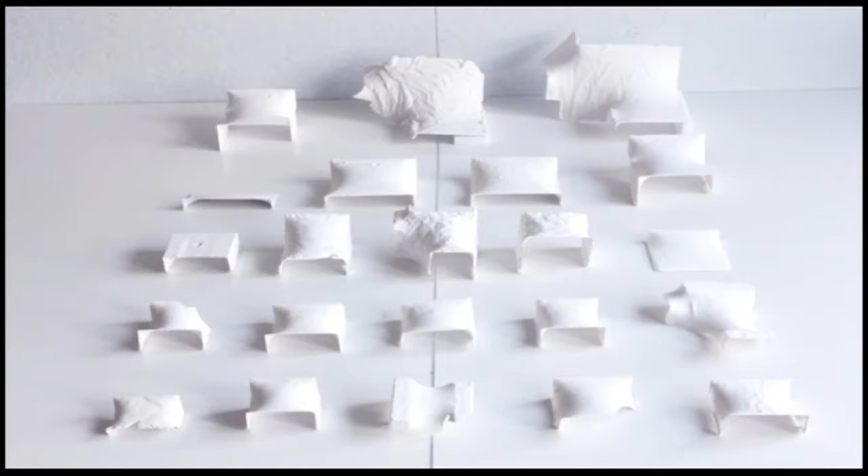At the same time, in our office, through casting, we started to see what these forms are and how they bring light in. And now we are about to start construction, working with a construction manager to figure out how to actually make this very complex concrete curvature.

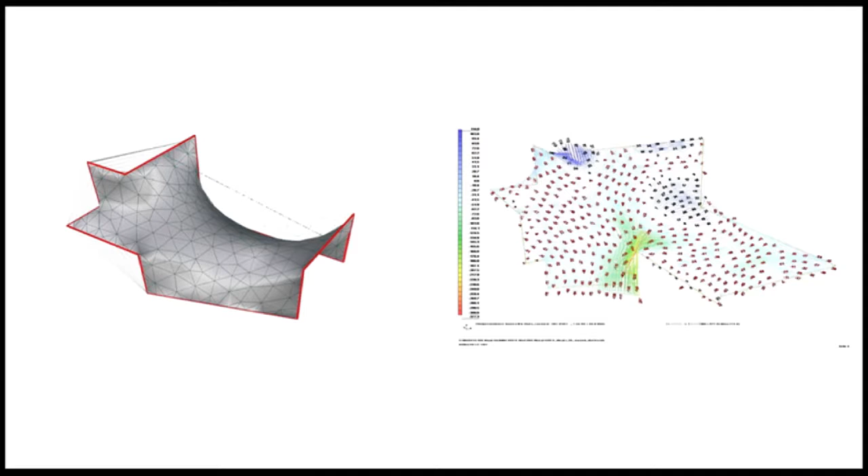This is the geometric model, and we worked with friendly engineers on the structural model on the right. What's interesting is that this is sort of a hybrid structure that transitions from shell structure to column, and this shows the thickness—blue is 2-inch and red is 6-inch. So structurally this concrete is a hybrid between something that spans as an arch and at the same time is a column.

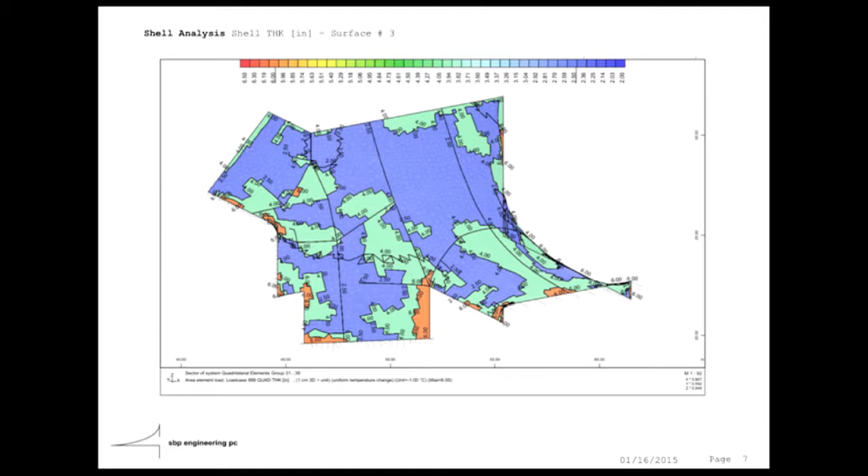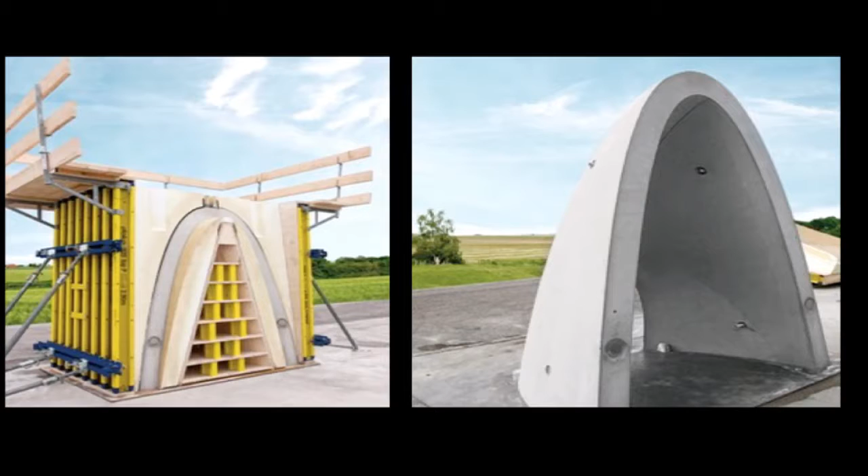But most likely we will work actually in wood, but with digital fabrication that cuts all the pieces in this complex geometry.

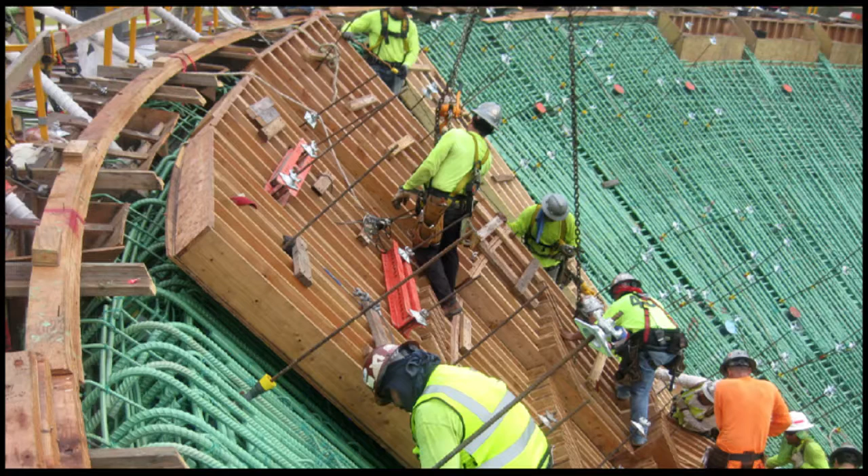This is a company in New Hampshire, and this is the museum they're currently building in Miami—the aquarium by Grimshaw. This building will start construction hopefully very soon; early next year we should start.

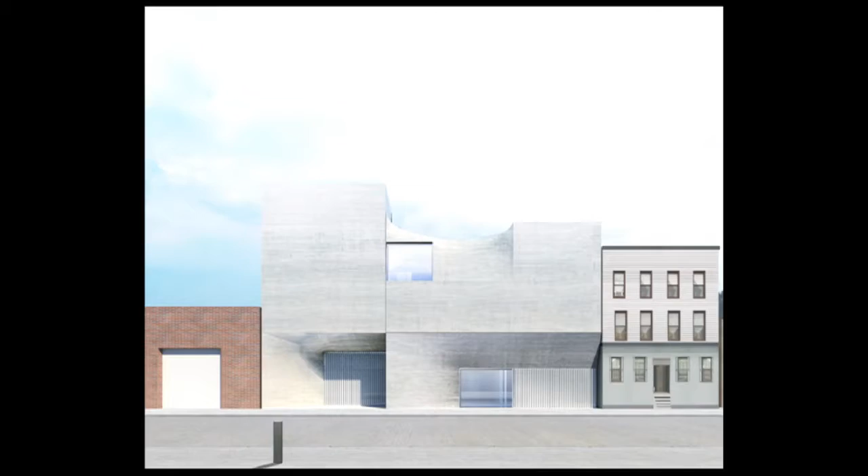This building then led to other fantasies and obsessions that we're now exploring, about things that sit in other things. They informed a very small installation we did in LA recently for a bust, but also a larger competition entry for a building in London, which we didn't win.

This is the storefront for art and architecture, designed by Vito Acconci and Steven Holl. What is very fantastic about this building—I don't know if people have been to New York—is that it is a facade, but the facade opens up and pushes into the street, creating this space in between the private domain for art or culture and the city.

We wanted to think about how to rethink or reactivate this facade. The show happened in the middle of winter, and we really wanted to find a way in which this facade could open up. So what we decided to do is actually shrink wrap the facade itself.